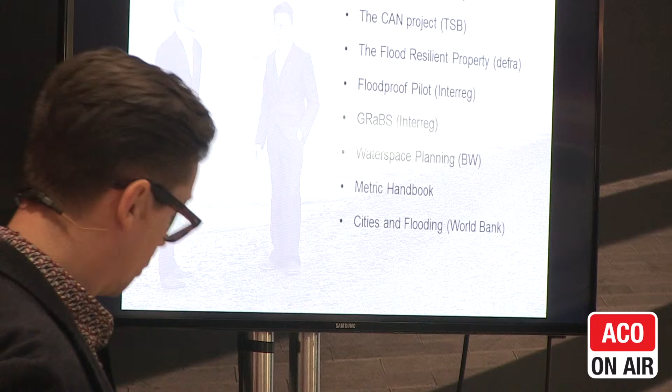So just very quickly and briefly, the most critical project we've been involved in is called the LIFE project, Long-Term Initiatives for Flood Risk Environments. And it was the first time in UK policy, and the equivalent policy in Holland is called Making Room for the River, that instead of building flood defences, we allow water, make space for water, allow it into your built environment in a predetermined fashion.

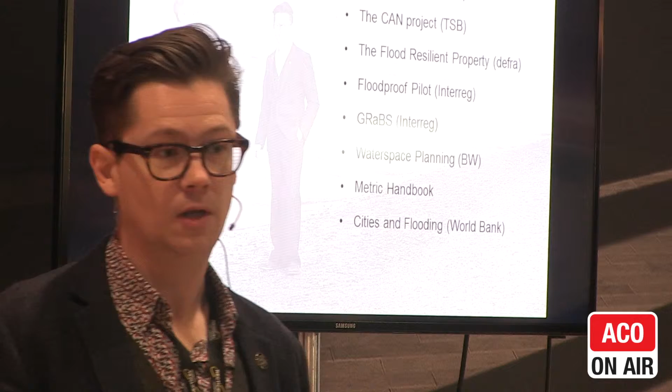Now, as an architect and an urban designer, that's very challenging and very exciting, because up until now we hid water, we've been culverting rivers. So how do we embrace water? How do we live with it? Where's that water going to go? Because there's going to be some phenomenal quantities.

I'm going to focus today on the Amphibious House, but the Amphibious House is just one component of a body of research which we've worked on over the last decade. There's a whole new chapter that's been introduced to the new Metric Handbook, which is now sort of the architect's Bible, which will tell you some of the core principles of what one needs to embrace in terms of the types of flooding and how one either avoids, elevates, flood resilience, flood resistance, a palette of tools with which as a designer one can approach design.

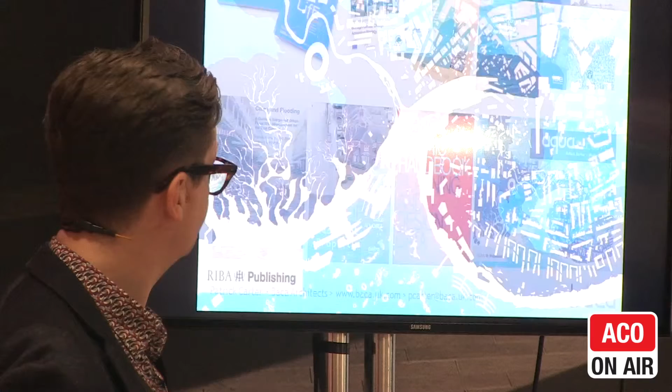Today I'm going to talk about the building for which we're probably most well known, the Amphibious House, and it's quite nice that even the Daily Mail said positive things. They've said a lot of negative things about a few of my buildings, but it's really captured the public's imagination.

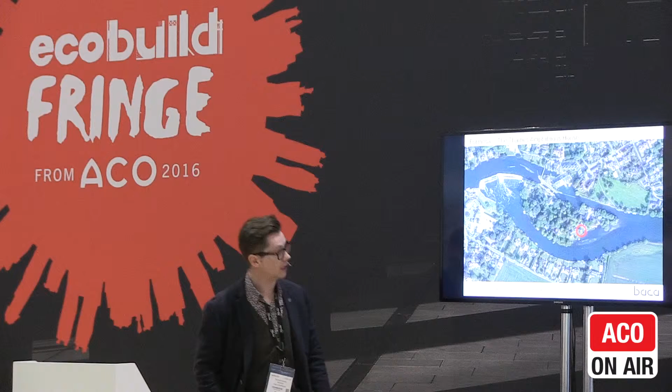Our client lives on a wonderful site on the River Thames, not unlike many other sites. But during the winter of 2012, it was really hit by severe flooding. As you can see here, he lives in the functional floodplain, flood zone 3B. The Environment Agency does not let you build housing here, so if one wants to build a dwelling, it has to be a replacement dwelling.

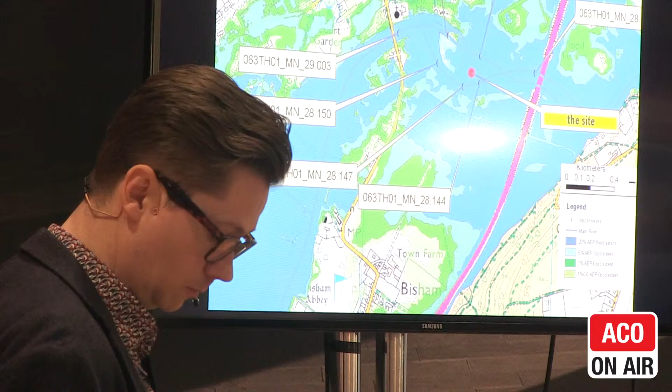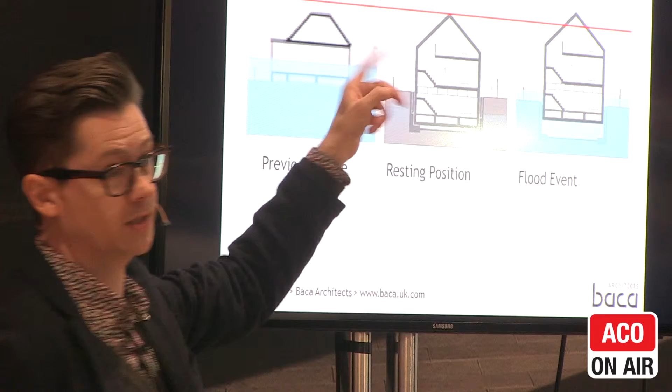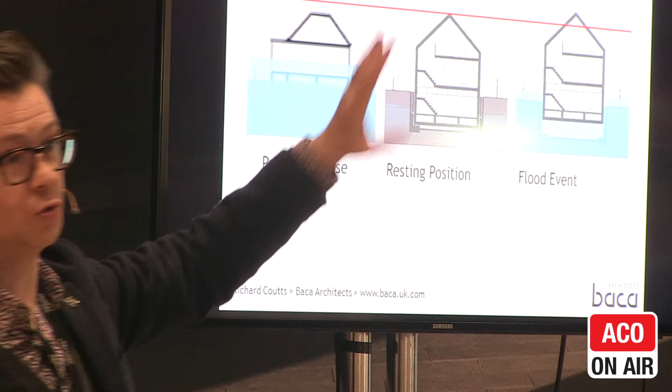Now, there's a number of challenges currently in the UK planning system. The Environment Agency asks that you elevate your new ground floor above a 1 in 100 year flood event, plus 300 mil freeboard, so it's quite a substantial amount. Equally, many areas along the River Thames are also greenbelt, so there are covenant rules about how high these ridge heights can be. So at the moment, there's a real conflict in policy.

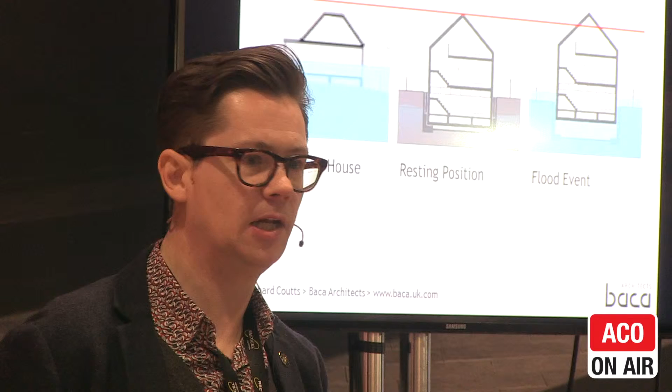So if my house floods and I want to replace it, you're kind of trapped to this level if you want to do an elevated property. And in some areas, we're looking at a current site in Shepperton, it's 12 steps up, and it's an elderly couple. It's going to get winter, it's going to get icy. I think it's a little bit unreasonable to ask them to go up and down those steps every day, especially in old age.

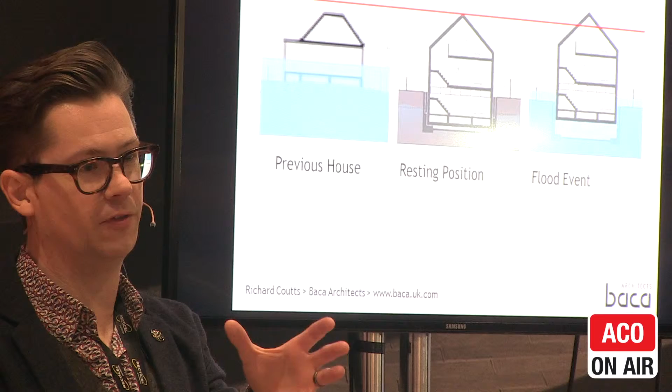And equally, it dislocates you from your garden. And we have seen some examples in New Orleans where they've elevated this ground floor over 2.5 meters. So rather than having the vocabulary of the veranda, which is this lovely shaded area, this interstitial space between yourself and the garden, these have become balconies in the air waiting for this 1 in 100 year event. So they're quite incongruous with their setting.

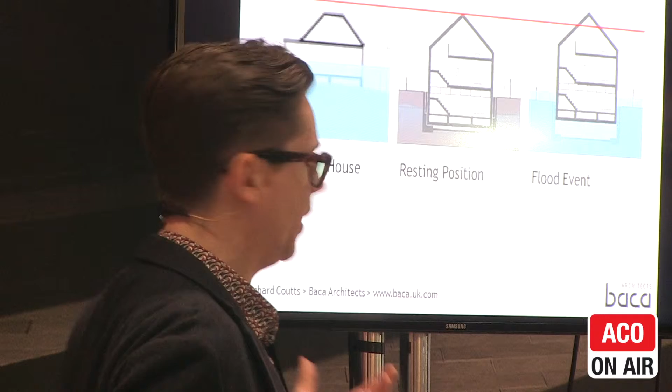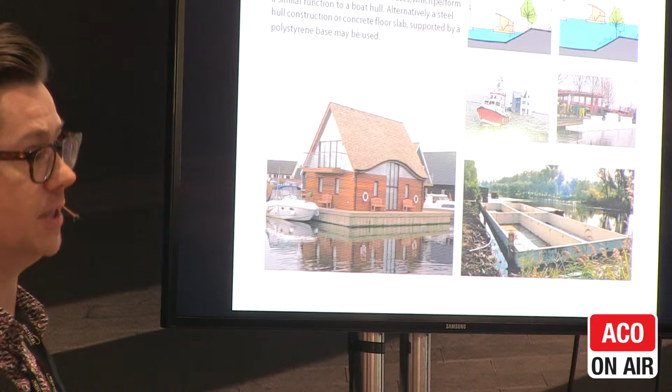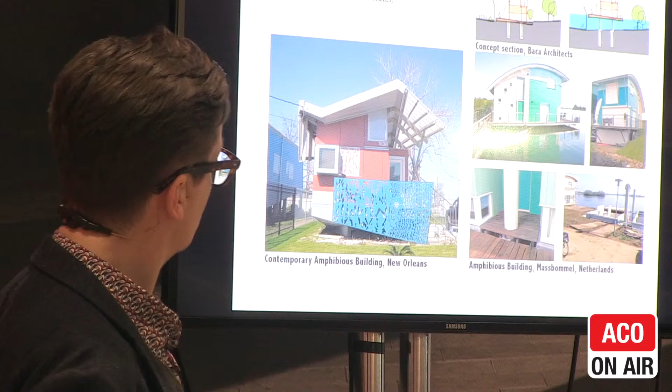Whereas an amphibious house has the benefit that your ground level, so your primary floors, are at ground level. You can create a lower ground floor, which provides the buoyancy. You can put all your environmental kit in there, but it displaces and provides sufficient lift during a flood. And when we approached the Environment Agency, we talked about a floating house, but we didn't own the river. So the Amphibious House gave us the best balance of solutions over, for example, the stilted property.

Things we had to deal with on the Amphibious House. First of all, there was no precedent in the UK for planning. So we had to work with some colleagues over in the United States and in the Netherlands to help us provide sufficient precedent to provide the base case to show that this would work.

There were no building regs. That still exists, and we're trying to work with LABC to start to bring displacement and buoyancy technologies into the building regs. And then environmental, we also need it to be low carbon where we can, because the more new houses we build, we're likely to exacerbate climate change. So these are the constituent parts of a contemporary modern methods of construction amphibious house.

We have the wet dock, so if you think about the Royal Docks or the Albert Dock in Liverpool, a man-made structure. Now, it retains the ground around the outside. It has a permeable base, which means it's hydrologically linked to the river. So as the river rises, it doesn't overtop it. It comes up slowly. We'll go on to the intuitive landscape in a minute.

Number 2 is the buoyant foundation. That's just a simple waterproof concrete basement. That's then tethered with things which we call dolphins, which are just masts. And then the key component which links all these together is the flexible connection, which is all of your utilities: foul, drainage, electricity, and water.

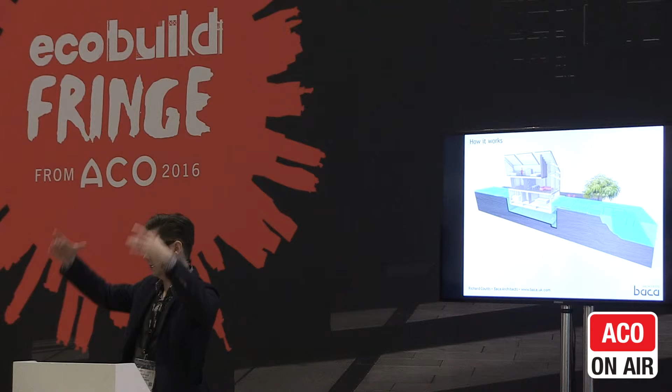So this is a cross-section through the site. You can see the basement there, and how the house will rise during a flood event. And it is, in fact, designed to travel over 2.5 meters high. If through climate change we need it to be a little bit higher, then we can just extend the tethering posts. The building needs approximately 2 meters worth of water around it before it starts to move.

I suspect the video is not going to work. So as a backup, we've got some slides which show you the construction method.

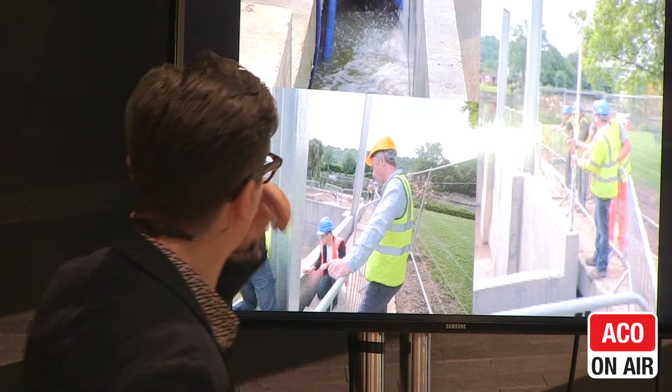So you can see there's Matthew from Techniker, a very good engineer. We pumped the water, and we did 2 float tests. We did one with the basement to make sure that it hadn't bonded to the wet dock, and then when the superstructure and the house was fully laden with furniture, so if the client puts a bookcase in the corner, we can calibrate it.

And one of the assumptions that we have with this house, and we've started to incorporate this into the planning documents and building regs, is that we treat this like a car. So every year you take your car for an MOT, we would like it to be tested. So you fill the dock with water, you test that the traveling mechanisms work, and it all works perfectly.

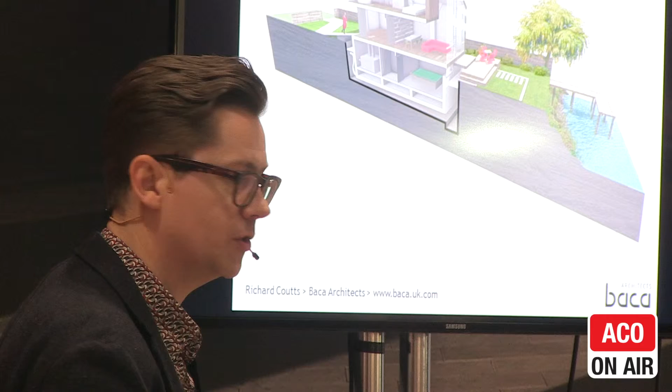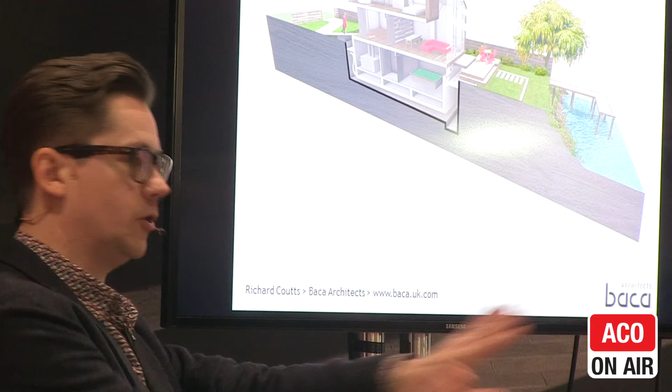Now, one of the things I just wanted to talk to you about very quickly is over-reliance on technology. One of the big issues that they had in New Orleans, and if you go back there, it's quite incredible, but they've rebuilt the flood defense wall, and they've built suburbia directly behind it with these beautifully manicured lawns. And they go, well, it's a 1 in 100 year flood event.

It flooded 10 years ago. We're free for the next 90 years. The problem is, on the other side of that levee, the water creeps up. The hurricane comes, it will be overtopped. So what we've devised is a thing called the intuitive landscape.

So what we have in the garden is a series of flood cells. So it's just a series of water terraces, and by the time the second terrace has been inundated with water, the house should have started to move. And we've taken that whole theme to a park in Paris. So that sits along the River Seine.

And as the park starts to flood, it's an early indicator to the residents that you should start to move to safe havens. So I think there is an absolute place for technology, and with apps, we can use the flood warnings. But within a built environment, particularly with flooding, one shouldn't be over-reliant on technology.

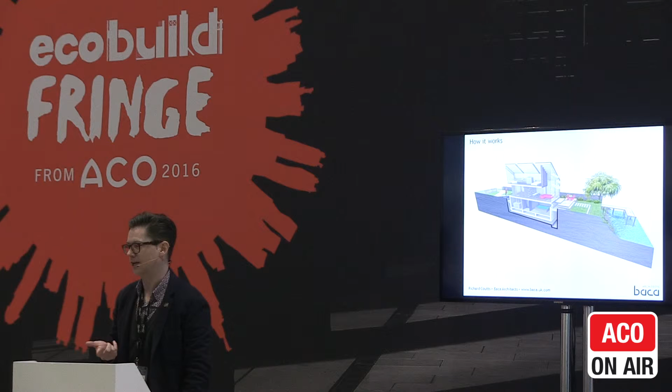Oh, sorry. A fascinating project. When I first saw it, it's one of those projects you think, are they really doing that? Is that really happening? And I suppose the answer to the question is yes. And I suppose it does beg the question, what do you think, Richard, is this a one-off? Is this a repeatable structure? Is this just a one-off flight of fancy that you've managed to get some punter to pay for?

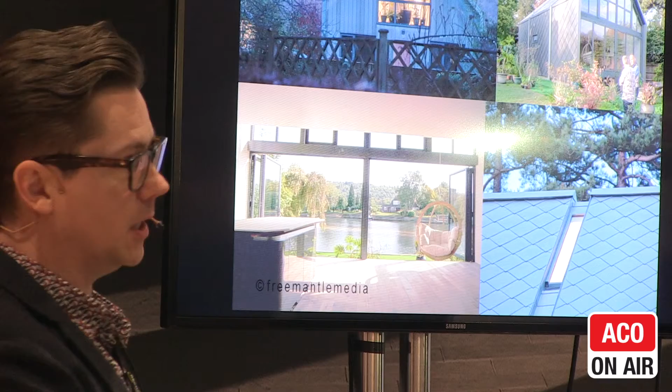I think that's a very, very valid question. And what's interesting today is I'm actually meeting a large developer to talk this through. Because of the lack of building regs at the moment, our flood-resilient buildings have been reliant on privateers because they can build their housing without having to borrow any money. That doesn't help the everyday person, doesn't help the people in Cumbria.

So what we're trying to do now is encourage CLG, encourage City Hall to support building regs embracing displacement and flotation structures within the building regs. As soon as that comes forward, that unlocks mortgages, because if you want to get a mortgage, you need LABC warranty. As soon as that chain falls into place, you will see these being rolled out.

And every time this appears on Grand Designs, the phone gets busy, and we get 100 or so phone calls. So there's a need there. There's a taste. We just need the government to catch up. And what sort of costs are you? What is the premium on top of a standard house to do this? I imagine quite a lot.

It's not as much as you would suspect. This was more expensive because it's on a private island and didn't have any road access, so everything had to go across the river. But broadly, the basement is the same as a basement that you build in central London. So the only uplift is the wet dock. So in that sense, it's only 10–15% more. But what one has to remember is these are normally premium sites. So if you can maintain insurance and you've got uninterrupted views of the river, it kind of pays for itself.

Yeah, I mean, the other thing on my mind is maintenance. You say an annual MOT. Who does that? So within our contracts with the client, we've obliged them to undertake that themselves in the same way you would be a boat owner. And there's a very simple regime that one follows. So the house is floated once every year. Some components will last 5 years, and some components will last 20 years. And so at the moment, it's down to the client. So you have an annual flooding event.